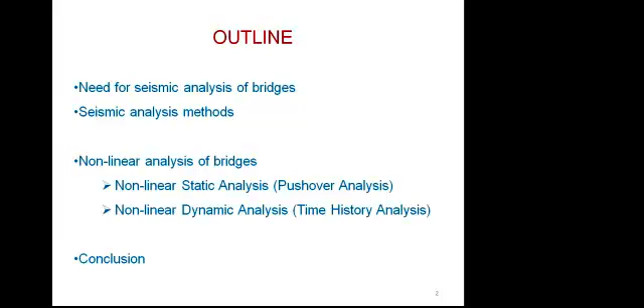Let us see whether seismic analysis of bridges is required or not. When we look at the past history of bridges, they were constructed based on their functional requirement. They should facilitate the transportation of men and material from one place to another. Their performance during extreme loading like earthquakes was almost neglected. In fact, there were no code books to take care of seismic forces acting on bridges, and building codes were used for the design of bridges too in the past.

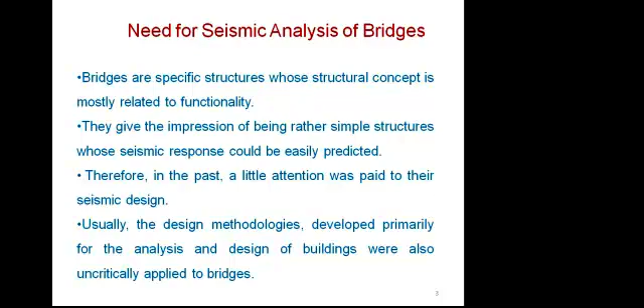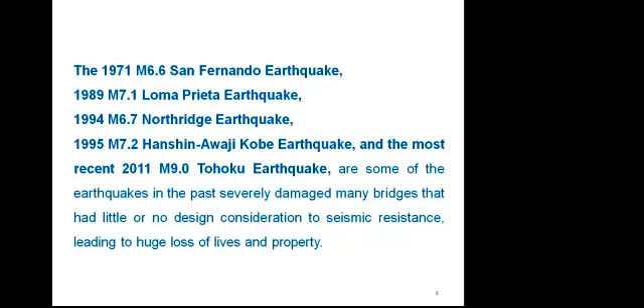After experiencing significant damages due to earthquakes all over the world, engineers and designers felt that there should be proper guidelines to safeguard the bridges. India also witnessed medium to high magnitude earthquakes in the recent past, like Burma-India with magnitude around 6.8, Uttarkashi 6.6, Killari earthquake 6.4, Jabalpur earthquake 6, and recently in 2001 the Gujarat earthquake 7.7. During these earthquake events, the performance of the bridges was not satisfactory.

After the lessons learned from past earthquakes, we have come up with the seismic code IS 1893 Part 3 for bridges. As civil and structural engineers, we should ask ourselves whether we are prepared to face any medium to high magnitude earthquake in the future. If we say yes, how are we going to protect our existing bridges as well as upcoming bridges?

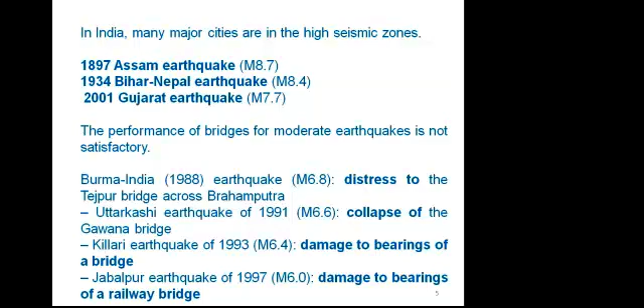For new bridges, we may say we will follow the guidelines given in the code book. But the code gives only general requirements, while the performance of different types of bridges varies from each other—they are unique. Therefore, it is necessary to evaluate the seismic behavior of existing and new bridges using various analysis methods. Now we will see what various seismic analysis methods are available.

These methods are categorized into two groups: elastic methods and inelastic methods. Under elastic methods, we have linear static analysis and linear dynamic analysis. Elastic methods are based on force—strength is the main criteria. We assume the structure is within the elastic limit. But in reality, during earthquakes, structural components deform beyond their elastic limit, so results from elastic methods are not reliable. They may be used for initial analysis or design, but if we want realistic responses, we have to move to inelastic methods.

Under inelastic methods, we have nonlinear static analysis and nonlinear dynamic analysis. Both methods are based on displacement, meaning the structures, or components of the structures, are permitted to deform beyond their elastic limit.

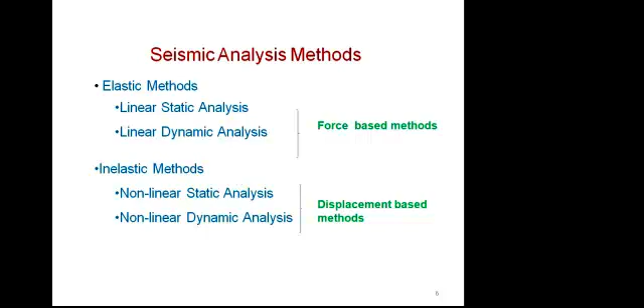So the results or responses from inelastic methods are reliable and very useful for the design of very special structures like bridges. The code IS 1893 Part 3 recommends 4 methods of analysis for the calculation of seismic forces.

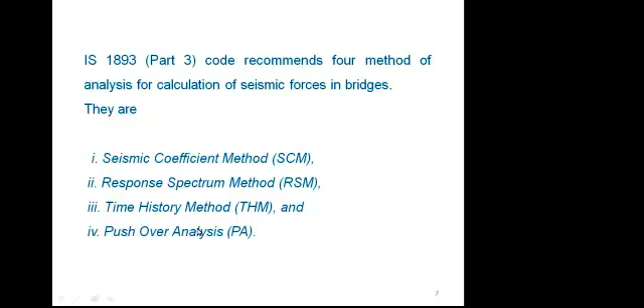The first one is the seismic coefficient method, response spectrum method, time history method, and pushover analysis. The first two methods are elastic methods, while time history method and pushover analysis are inelastic methods. We'll see these one by one, and we have to know whether we have to carry out all these 4 analyses for all types of bridges.

No. The code specifies the method of seismic analysis of bridges for different types. Here in this table, we are showing the earthquake level - this is the design basis earthquake level - and the category of bridge: regular, special regular, and special irregular.

For regular structures, only the seismic coefficient method is sufficient. For special regular bridges, we have to carry out response spectrum method and time history method. And if it is a special irregular bridge, then we have to conduct all 3 methods: response spectrum method, time history method, and nonlinear pushover analysis.

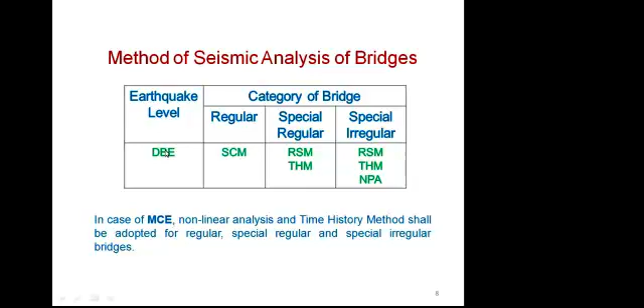When we consider the MCE, that is the maximum considered earthquake level, all categories of bridges should be analyzed using the nonlinear time history method. The seismic coefficient method will not be useful when we consider the maximum considered earthquake level, since it is almost double the DBE, design basis earthquake.

Now we'll discuss each one by one. The first one is the seismic coefficient method. Here the seismic force is calculated based on the weight of the structure. F is the lateral force acting on the bridge, AH is the horizontal seismic coefficient, and W is the total weight of the structure. This horizontal coefficient depends on many factors like zone factor, importance factor, response reduction factor, and SA by G.

This SA by G is the spectral acceleration coefficient. These values and data are all given in the code book IS 1893. You can easily calculate the horizontal coefficient, and then if you substitute it here, you will get the lateral force acting on the bridge or structure.

In the case of the seismic coefficient method, we consider only the fundamental mode - that is, the first mode, first frequency, or first time period is considered for the calculation of forces.

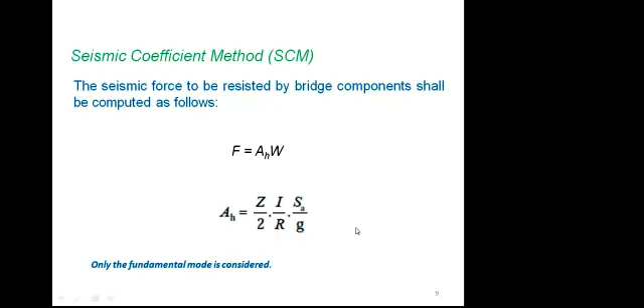Now we'll go to the second method, the response spectrum method. Here we have the higher mode contribution also, so we are considering higher modes also for the calculation of the lateral force acting on any structure, here the bridges.

Here again we have to know how many modes should be considered. The code specifies that at least 90% of the mass should participate in this vibration. So to know this, from the calculation we will come to know the mass participation for each mode. For example, the first mode mass contribution is around 80%.

Then the second mode is 10%, and the third mode is again 10%. So with the first mode at 80% and second mode at 10%, we can consider only the first two modes for the calculation of lateral force acting on the structure.

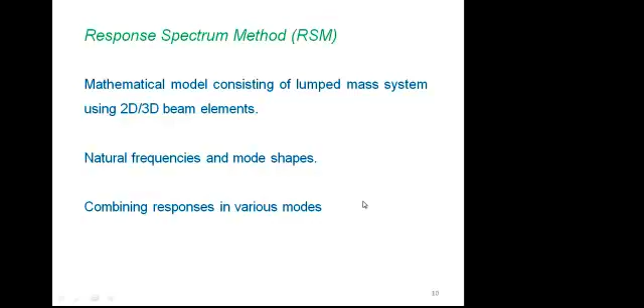Then we will calculate the responses for each mode, and finally we will combine these responses to get the total response using the methods given in the code book - the SRSS method and the CQC method.

The next method is called the time history method. This is the nonlinear dynamic analysis. Here we are using the actual earthquake data for the analysis to get the response of any structure.

Suppose the time history for a specific site is not available - for example, if you don't have the site-specific time history for the Chennai region, we have to select a time history with similar topography and soil characteristics for that region. We have to collect at least three time histories that should be used in the analysis, and there should also be some specifications or characteristics for these time histories.

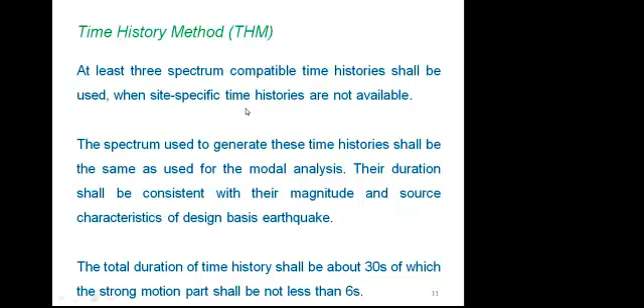The total duration of the time history shall be about 30 seconds, of which the strong motion part shall not be less than 6 seconds. So the selection of the time history is also very critical here, and from the time history method, the responses will also be in terms of time history.

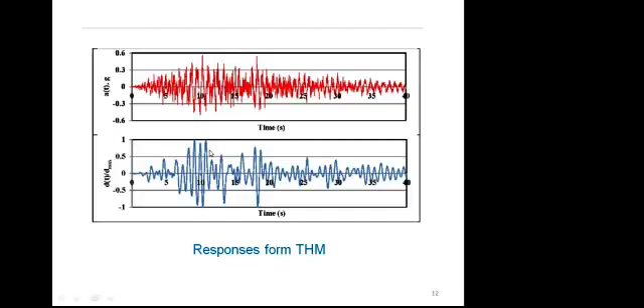For example, you look at the first one, it's the acceleration time history. The second one is the displacement time history. So here we have the peak, and for the design, the maximum value or maximum response will be used.

Then the next one is the pushover analysis. It's a static nonlinear analysis.

From this analysis, we can find out what is the capacity of the structure or bridge, and whether it can sustain the demand from the particular earthquake. This is a very simple analysis when compared to the time history method.

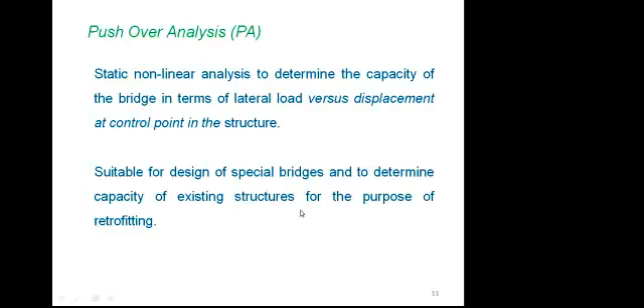Therefore, engineers and scientists mainly use the pushover analysis. This method is suitable for design of special bridges and to determine the capacity of the existing structure for the purpose of retrofitting. If you want to evaluate a large number of structures within a short period of time, pushover analysis is very suitable, and we can verify the design of new construction of bridges. Then existing structures can be evaluated to identify the damage level.

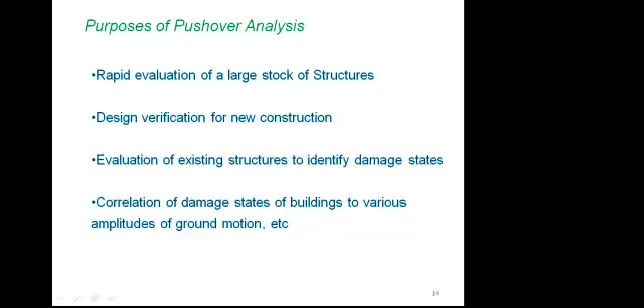There are two key elements in the pushover analysis: demand and capacity. Capacity is the ability of the structure to resist the seismic demand. The demand is the representation of earthquake ground motion.

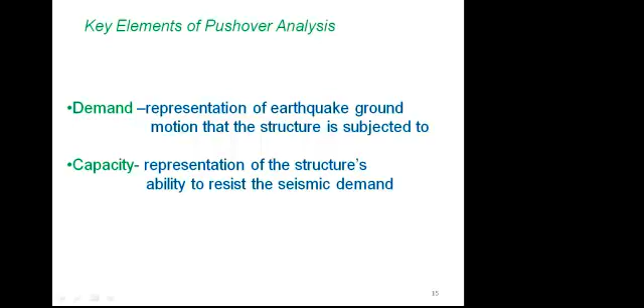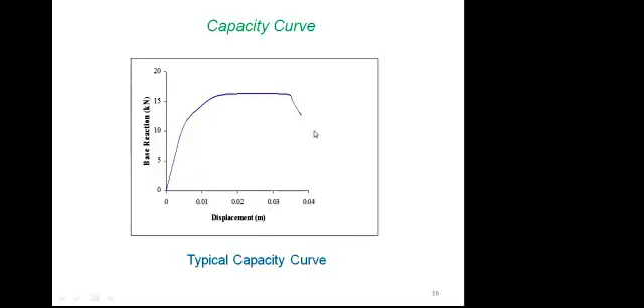From this analysis, we can see whether the capacity meets demand or not. This is the typical capacity curve, drawn between base reaction versus displacement. This is the typical demand curve, derived from the particular earthquake ground motion, in terms of spectral acceleration and spectral displacement.

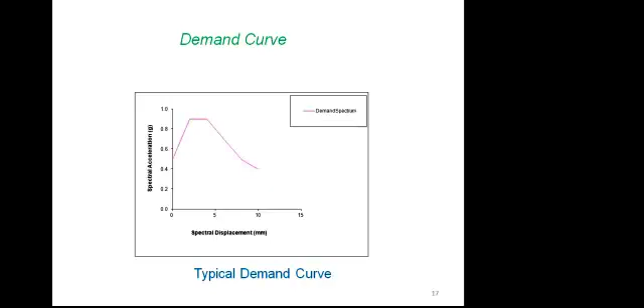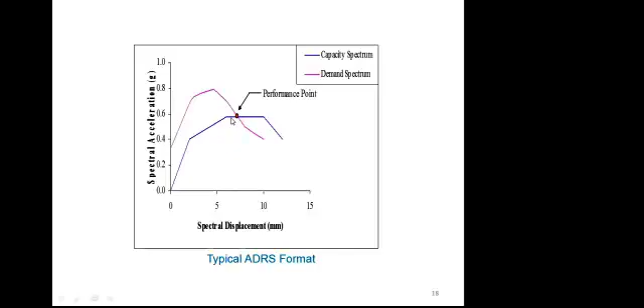To know whether the structure's capacity meets demand or not, you have to combine these two curves. This is the combination of the capacity curve and the demand curve, in the form of spectral acceleration and spectral displacement. If there is a performance point, that means there is an intersection between the capacity curve and the demand curve, then we can say that the structure or bridge can sustain the particular earthquake.

From this base shear variation with lateral displacement curve, we can find out the damage level for different types of structures. This graph is drawn between base shear and lateral displacement at roof level, top level. In the pushover analysis, we assume that if the structure is pushed in one direction, then we are monitoring the force and the displacement.

If you look at this curve up to AB, it's a straight line. If the performance point lies between A and B, then we can say that the structure is still in the elastic limit, with no damages. Between B and IO, IO stands for immediate occupancy - after any earthquake event, there will be some damages in the non-structural elements, so there is no worry about immediate occupancy, and we can say the structure is the same.

Between IO and LS, LS stands for life safety. If the performance point lies between these two, we can say there are some non-structural damages as well as small cracks in the structural elements, meaning the structure or structural components start yielding.

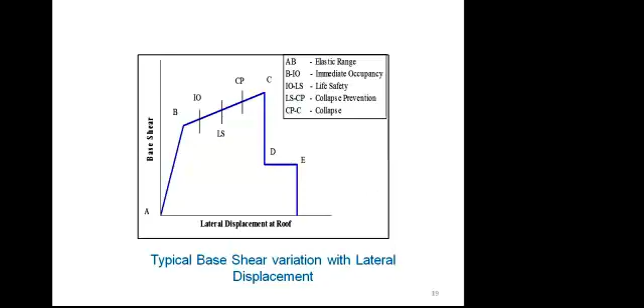For that, I have taken one typical bridge. We should know what components we are going to model for the analysis. We have a superstructure, which is the deck, then the substructure consisting of piers and bearings, and of course the foundation. Here you see a number of columns connected at the top using a beam - bridge engineers usually call this a column bent, where a number of columns join at the top.

Between the superstructure and the substructure there are bearings. In the superstructure, the girders or deck are not of the entire length because they are individual components - they will be connected using expansion joints. So in the analysis, the first step is to create the model of the bridge considering all these elements.

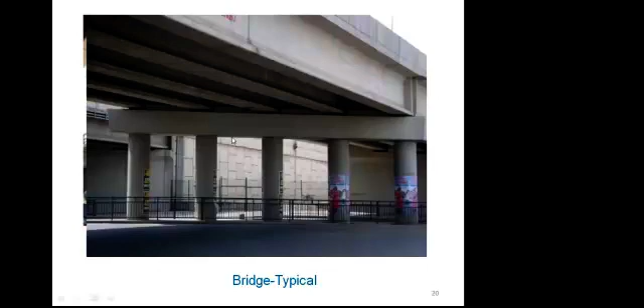Now we'll see one by one. For the analysis of bridges, we have different sophisticated softwares like SAP 2000, CSI Bridge, Midas Civil, and STAAD Pro.

Here I have taken the examples from SAP 2000 because I am comfortable with it. If you are not comfortable creating the model in these softwares, you can create it in AutoCAD or other software, then import it into the analysis software.

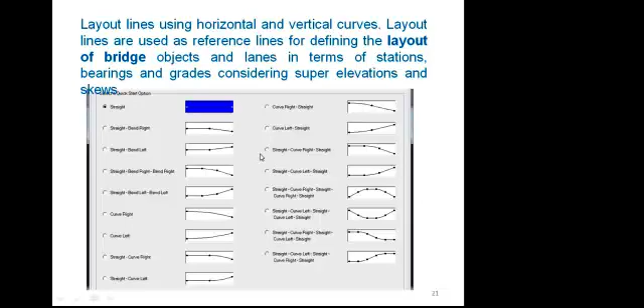The first step is to define the layout of the bridge. This is very important, whether it is a straight bridge or a curved bridge, and whether the curve is along the vertical or horizontal direction. That can be decided first. The number of spans can also be defined in this first step. This feature I have taken from SAP 2000. Depending on the requirement, you can choose the layout.

Next, we can choose the deck sections from the available data in the software. Here box girders, T-beam, flat slab, precast, different types are there. You can choose according to your requirement. These are the standard sections, but once you go into the software you can change or modify the dimensions. So it is a user-friendly software.

Then we have to get the model of the multi-column bent. This is nothing but the pier and the connected beam. Here the bent is modeled as a plane frame, and the bent cap is also modeled as a plane frame, while the columns or piers are modeled as beam column elements.

Normally the bent will be considered as a rigid one, and the columns or piers will be considered or modeled as plastic ductile members. At the base, depending on the type of soil and foundation, we can have either fixed support or hinge support. If you want to do soil structure interaction, we can have springs at the base, so we have to feed the properties of the springs at the foundation level to get reliable results.

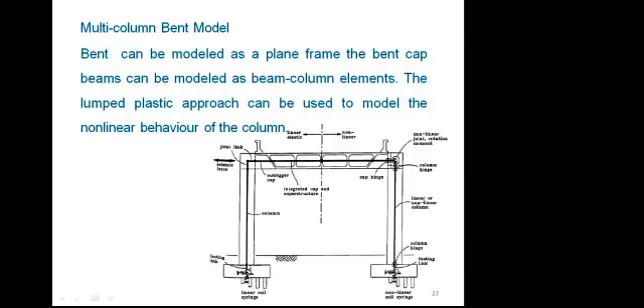Then the abutment, which is the solid element at the ends of the bridge. They can be modeled as pin, roller, or fixed boundary conditions. Again, if you want to do soil structure interaction, we can have a spring model.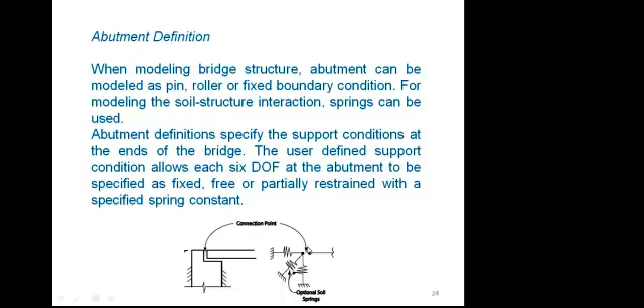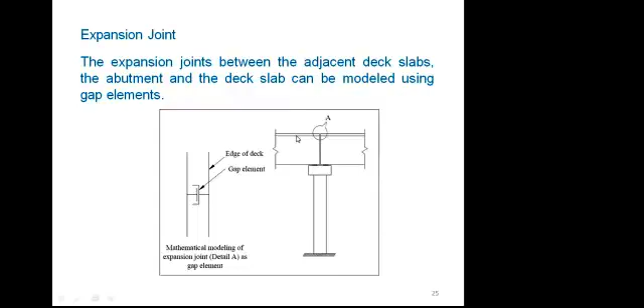Then expansion joints are modeled as gap elements. Look at this portion - this is the gap. So we can use a gap element here to connect these two. Then for the bearing, we use a linear spring element or link element. Initially you choose a linear spring element, but since we are going to do non-linear analysis, we have to feed the non-linear properties of the elastomeric bearing.

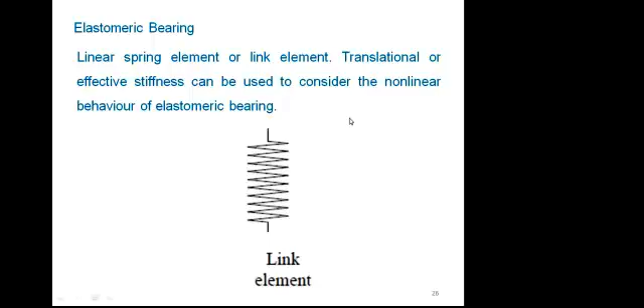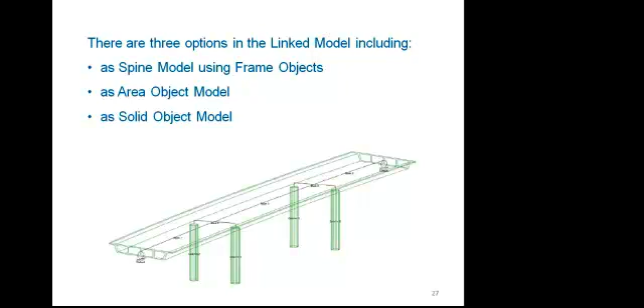So now we have defined all the components and the model. Now we are going to combine the model components. Here we have three options: one is the spine model using frame objects, then the area object model, and the solid object model. For example, consider this bridge - we'll see how it is modeled using these three options.

This is the area object model - here you look at only the thin element. This is the solid object model. Then this is the spine model. Most researchers have used this spine model because it is easy to create as well as to analyze. So we can have an area object model or solid model - for buildings, we usually use the solid object model.

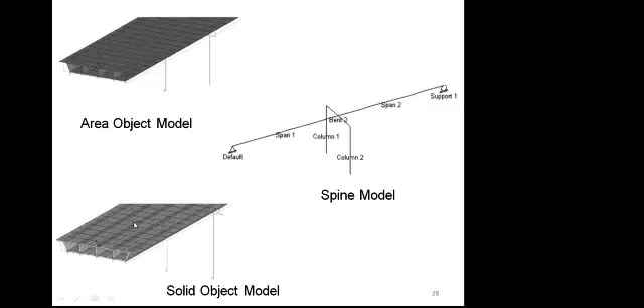For understanding, I have taken two examples from the literature. One is from northern Greece, with a span of around 638 meters. This is the original bridge, and this is the software model - 11 piers, then 2 abutments at the ends. It is curved in plan. They have used this spine model.

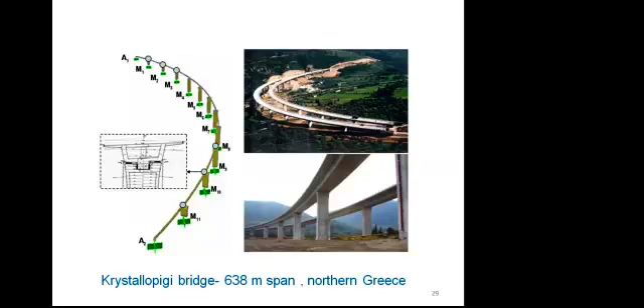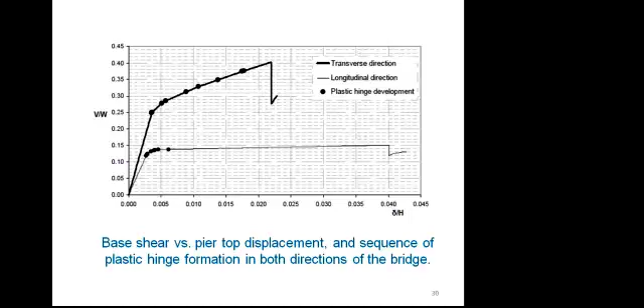Suppose you are going to construct a new structure with the same configuration, we can strengthen the weak sections in the design itself. So before construction, we can find out the different levels of damage due to a particular earthquake, so that we can minimize the losses after the earthquake event. So that's the advantage. This is one example.

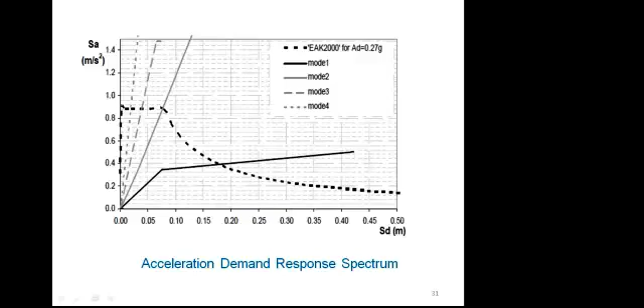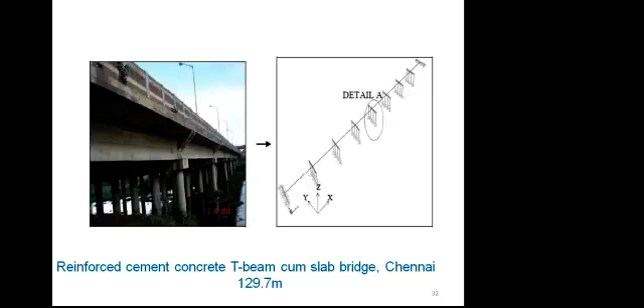Another example I have taken from Chennai. This is around 129.7 meters total span. Here again, this researcher has used the spine model, with 7 column bents and 2 abutments. This author has done both nonlinear time history analysis as well as nonlinear pushover analysis. This will be very useful, you can understand how to interpret the results from these two methods.

So here, initially I want to show the mode shapes. The mode shapes and the frequencies are obtained from modal analysis, only with their mass and stiffness. There is no external load or additional load. So here you just look at, this is the first mode, along the transverse direction.

Then the fundamental time period of this bridge is around 0.34, nearly 0.4. This is the first mode. Then the second mode is along its longitudinal direction.

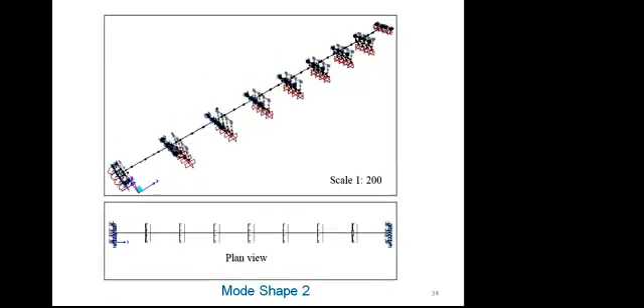Then the third mode. Now I am going to just go past these slides and you check whether there are any changes in the mode shape around the abutments. This is the first one, second one, third one. Here there are changes in the middle spans; in the end span, there is no deflection.

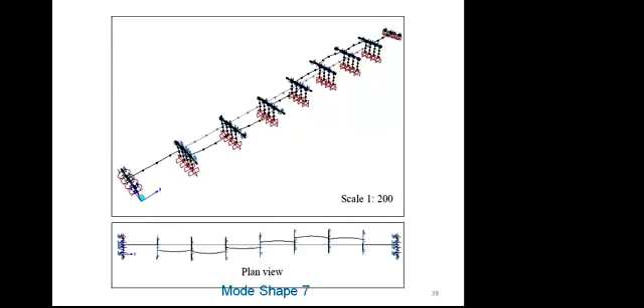Then fourth, fifth, sixth, seventh. Now look at the 8th mode, there is some disturbance in the abutment on both sides, left and right. So here we can say that the higher modes also influence the response of this bridge.

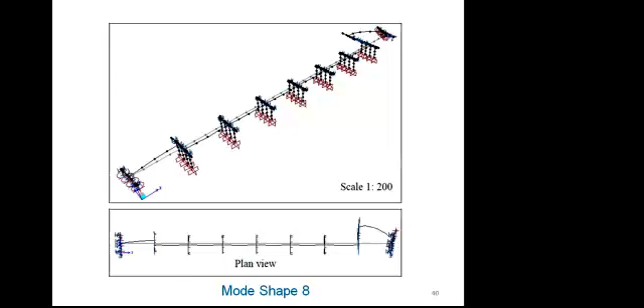So for this particular bridge, the author has considered the first mode, second mode and the 8th mode. Again here the mass participation is little significant, therefore they have used the first, second and 8th mode for the analysis. Even the 9th mode was considered, and here also you see deflection in the abutments.

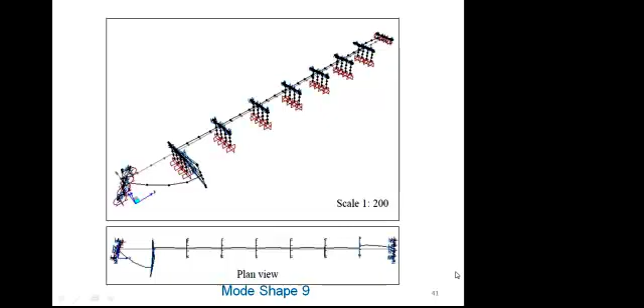Then from the pushover analysis, we can find out the plastic hinge formation. This is the plastic hinge formation in mode 1. Now look at B, the pink color - this is in the elastic stage. Then immediate occupancy, life safety, collapse prevention, collapse. Finally after collapse, definitely there will be total destruction of the structure, so don't worry about this.

Here you see the pink color, then blue color, then light blue color, and if you look at the middle column bent, there are yellow color hinges. That means they are weak. So before construction, at the design level itself, you can strengthen this part. This is the advantage of a pushover analysis. This is for mode 1.

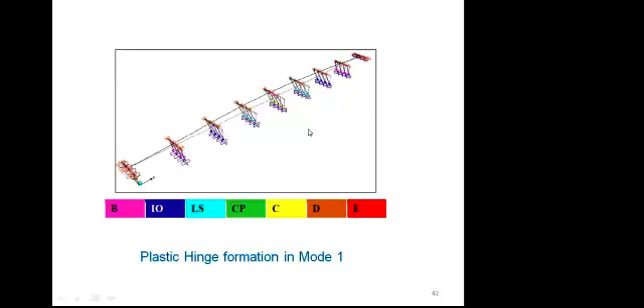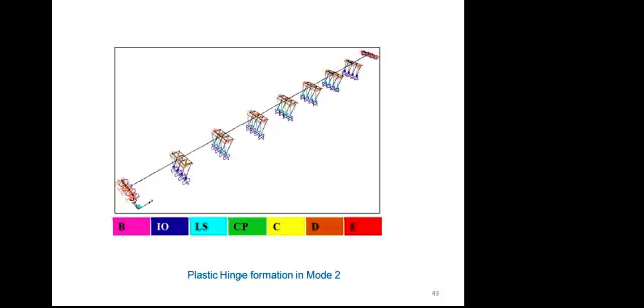Then mode 2, which is along the longitudinal direction. Along this longitudinal direction, the structure is safe because the in-plane flexural rigidity or flexural strength is very high compared to the lateral direction. Therefore here the hinges are in the elastic stage, not much damage.

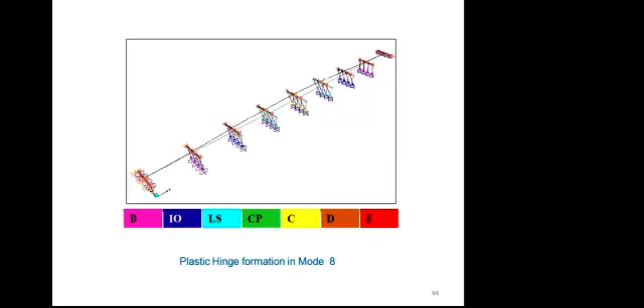Then we can see whether the structure is safe against a particular earthquake or not. Here the El Centro response spectrum is used for the analysis. Now look at mode 1, this is the capacity - the blue one is the capacity curve, and the green is the demand curve. Now here, are you able to see...

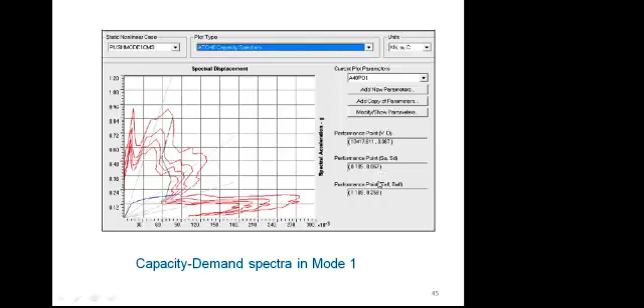...the meeting point of these two? This is the performance point. That means the particular bridge is able to sustain the given earthquake. Then we can read from the chart: the spectral acceleration is 0.185 and the spectral displacement is 0.067, that is 67 mm. So these values will be used for the design.

Then we will go to the second one. This is along the longitudinal direction. As already mentioned, it is very strong along the longitudinal direction, therefore you are seeing the linear one.

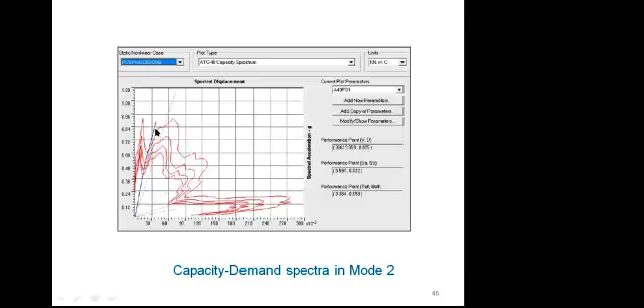So from this capacity demand spectra, we can conclude that the structure, or the bridge, is sufficient enough to resist the earthquake load.

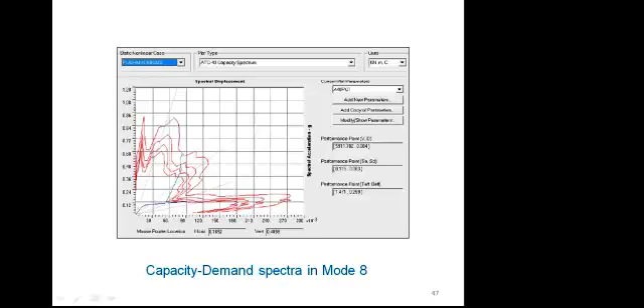Then they have used Elcentro time history for the nonlinear time history analysis. This is the Elcentro earthquake time history available on the net. Anyone can download and use it for the analysis.

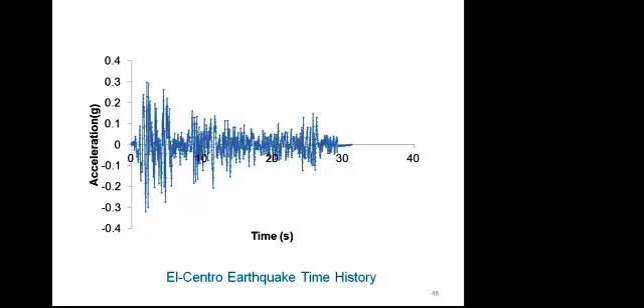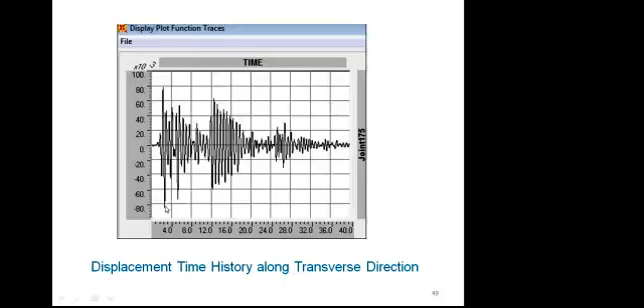Now from the time history analysis, they have found the displacement time history along the transverse direction. Don't worry whether it is plus or minus, you have to take the highest, peak one. This is around 82 something, in the transverse direction.

Then this is along the longitudinal direction. Along the longitudinal direction, the deflection is small when compared to the transverse direction.

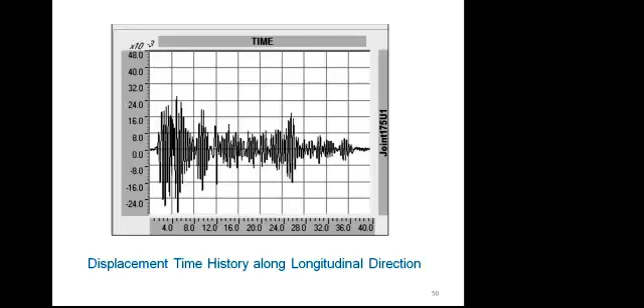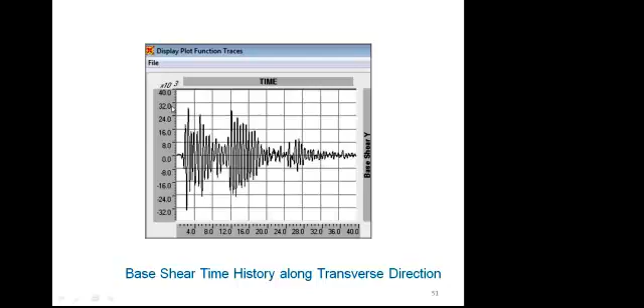And we can get a base shear. All the responses, in the case of time history analysis, are in the form of time history. This is along the transverse direction, 32 into 10 power 3 kilonewton. Similarly, along the longitudinal direction.

Now I just come to the final conclusion. Again, I have come to the first slide. I think you remember what I explained in the first slide, whether the analysis is required or not. The main objective of the analysis is to determine the response of the structure to excitations, so that we can ensure the structure can sustain the excitation with an acceptable level of response.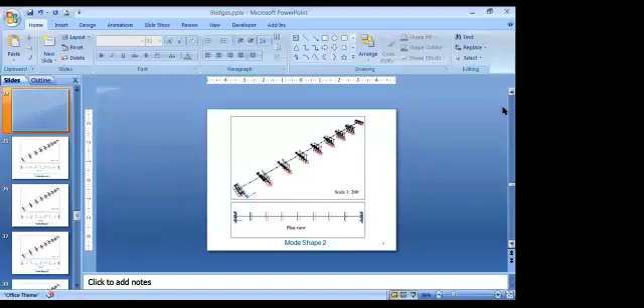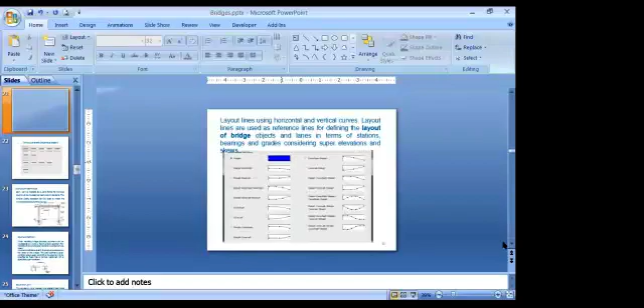That again depends on the span, depends on the demand from the client, and based on... one minute, I will go back to the slide. Okay, I think this is the slide. So it depends on the span and the importance of the bridge. We can select the various deck sections.

Ma'am, is it there in the code book, which deck to be used? No. It is not given in the code book. This type of sections are available in almost all the analysis and design softwares.

So it falls on the client's decision, we have to use the deck according to what the client asks. Some people, suppose I want to have a very aesthetic bridge, then I will not choose the ordinary T-beam, I will go with different shapes. That is one of the factors, but mainly it's based on the load coming on the bridge and the span.

Okay, ma'am. Thank you. Thank you, ma'am.